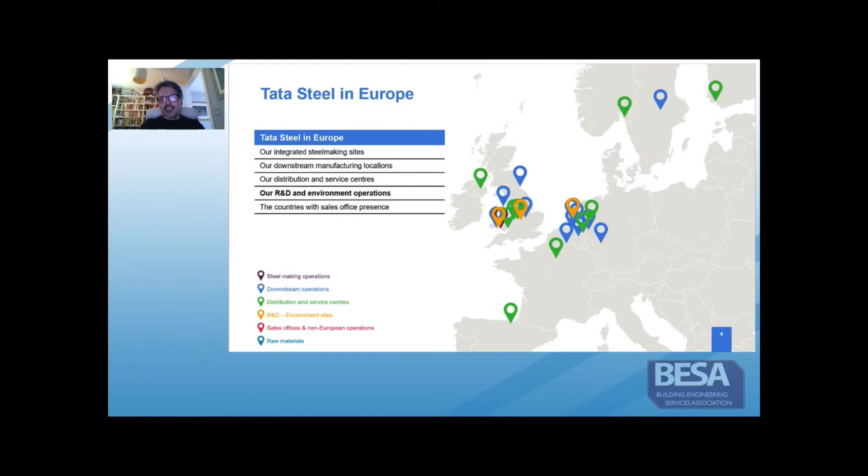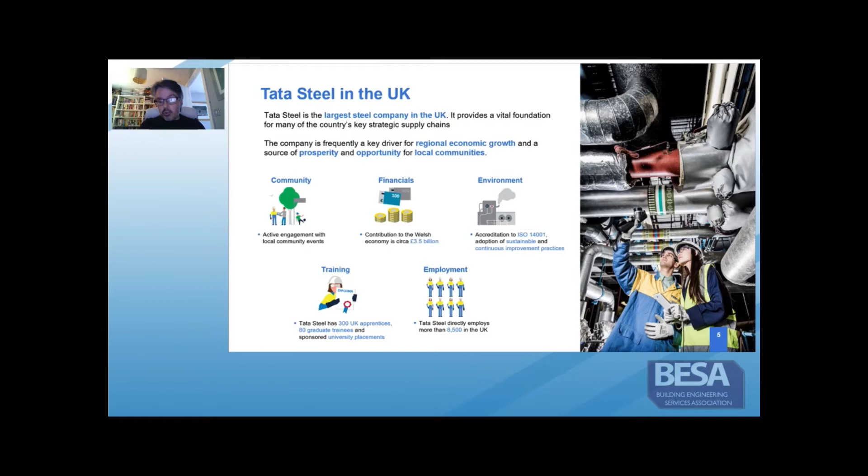Within the UK itself, we're the largest steel company. As a steel company, we act as a foundation clearly for many other industries and supply chains, employing about 9,000 people and engaged across academia, communities and many other partnerships, some of which are extremely important and we'll talk about today. But if we move on to the next slide.

And Tata Steel also have an environmental product declaration scheme that we're a program operator of. So that's a unique position for any manufacturer in the world. Unfortunately, we don't have time today to talk about that, so we'll talk about that another time. But in the meantime, if we move on to the next slide.

So that product is backed by years of experience, many decades producing those products from those assets. Those assets continue to improve with investment programs across the steel and the pipework manufacturing facilities. The products themselves are backed with a vast range of industry and product knowledge and expertise. I think engagement with manufacturers is a critical part of any design process, so we would certainly be pleased to further engage with the industry in this regard. So we move on to the next slide.

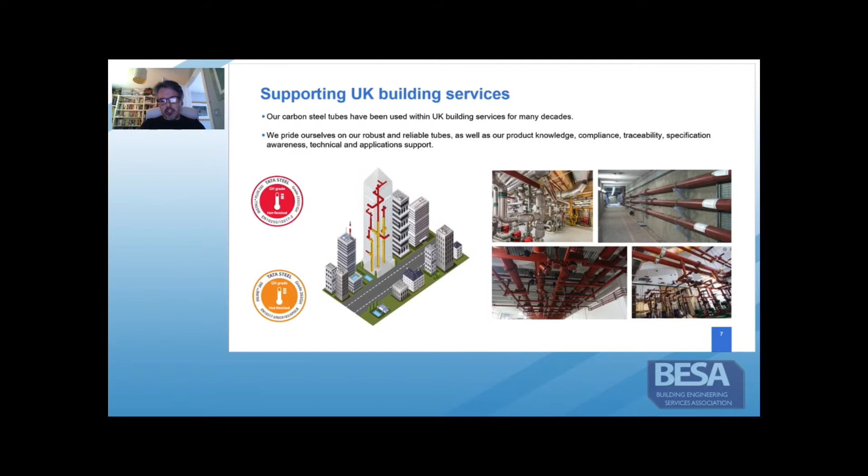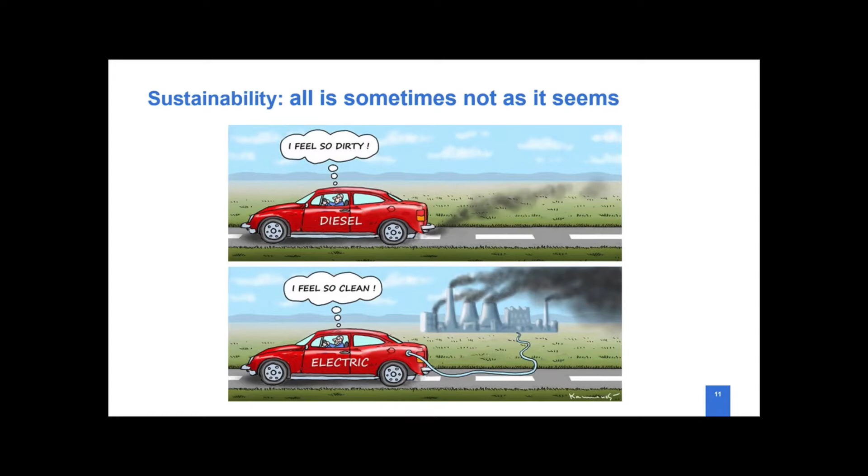So effectively, before we start, really important to understand, I think, that in this subject matter, all is sometimes not as it seems. These images here demonstrate that the subject of sustainability, and particularly environmental sustainability, which is the main focus of this presentation, is a complex matter. And whilst this image is a little bit tongue-in-cheek, there's a serious point behind it. It's a useful illustration that in environmental sustainability, making the optimum resource decision to limit the impact on our environment and our communities needs to consider the whole life cycle, the whole life impact, not just the immediate impact

of the action. So is it better to drive a diesel car and produce emissions directly, or to invest in an electric car and make the emissions further upstream, or ideally, of course, with renewable energy? The answer is, I don't know, without understanding the whole life cycle of the car, the power plant behind it, in order to make a more informed decision. And this goes to the heart of Tata Steel's sustainable development, that life cycle approach is a critical part of any decision making relating to resources. So we move to the next slide.

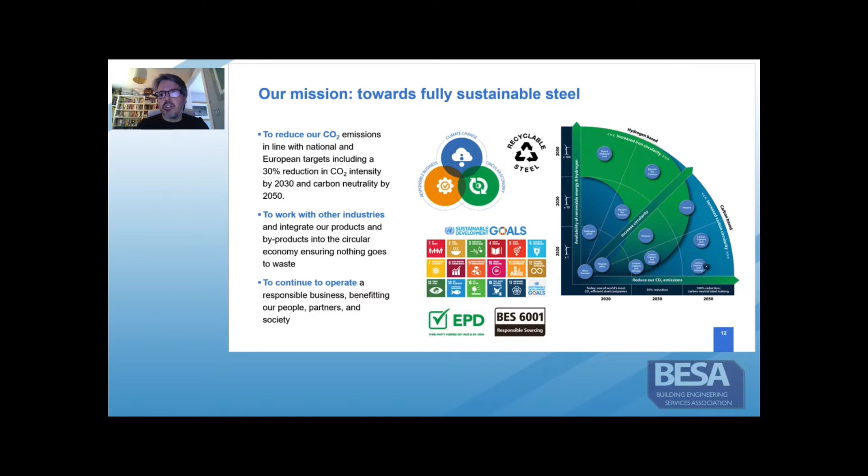So our vision across our sustainable development has three dimensions. Effectively, it's about decarbonisation, and we have a target of 30% reduction in CO2 intensity by 2030, with carbon neutrality by 2050. It's about working with other industries to leverage circular economy, ensure nothing goes to waste. And it's to continue to operate as a responsible business that benefits people, partners, and society. So moving on, one more click here, back to those three challenges.

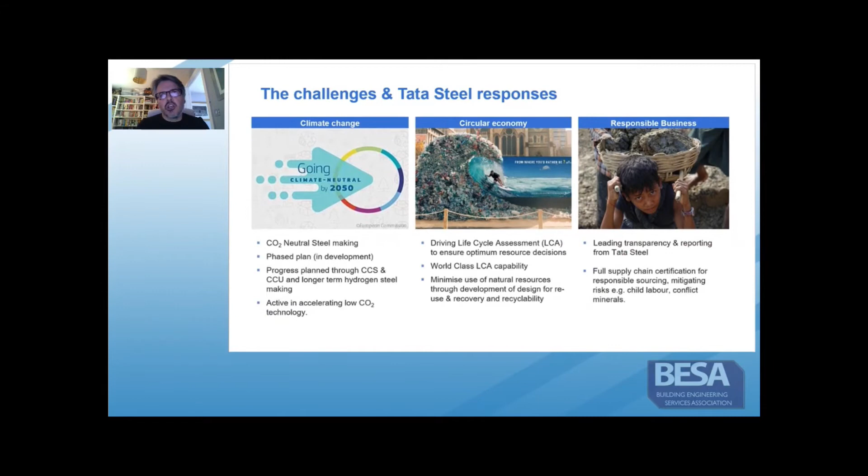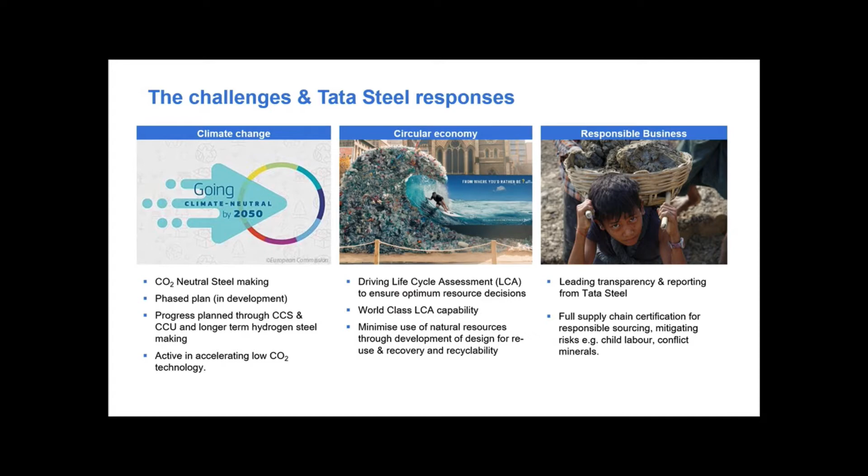So there's some detail here, which is a nice summary about where we want to go with carbon neutral steelmaking, about driving life cycle assessment, about minimizing resource use, not just within Tata Steel, but across the supply chain, and about leading in transparency and reporting. Some of these areas we won't have time to talk about today, but as I said earlier, really willing to engage. And if we move on to the next slide. So now we're going to talk about the pathways to carbon neutrality for steel and piping systems.

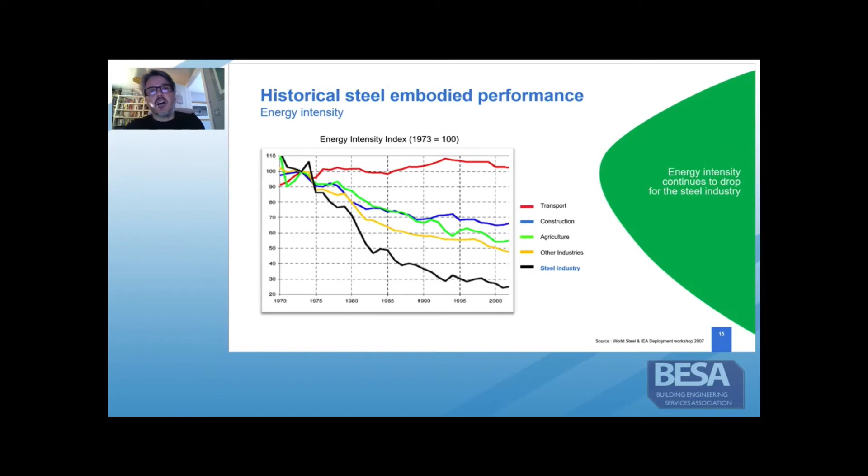And if we look at those pathways, a good place to start is with history. This slide here looks at the historic steel embodied performance related to energy intensity. And you can see the massive strides that the steel industry has made since the 70s up to, this is quite aged data now, but up to 2000, demonstrating the improvements that a number of industries have made in that regard.

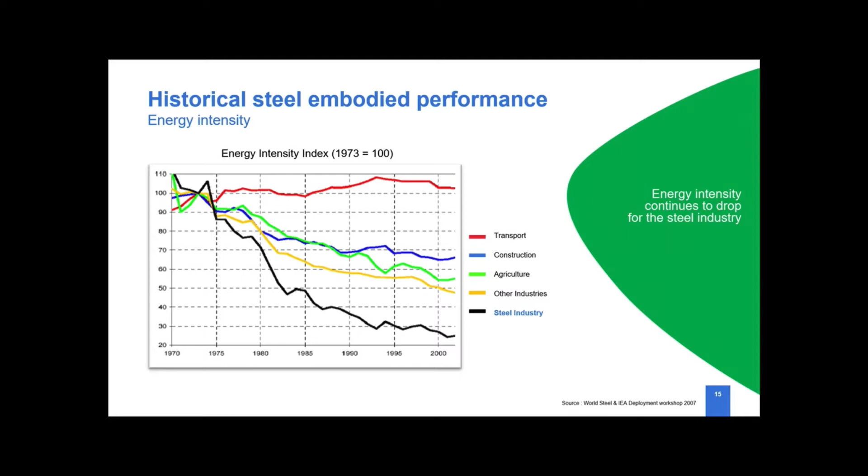And if we move to the next slide, this slide actually shows the carbon intensity of steelmaking from the early 90s. And since that time, there's been about 15% reduction in carbon intensity. And the variation you see around that trend relates to a number of variables: asset disposal, asset investment. But now we're getting towards physical limits of what's possible in terms of carbon reduction in steelmaking.

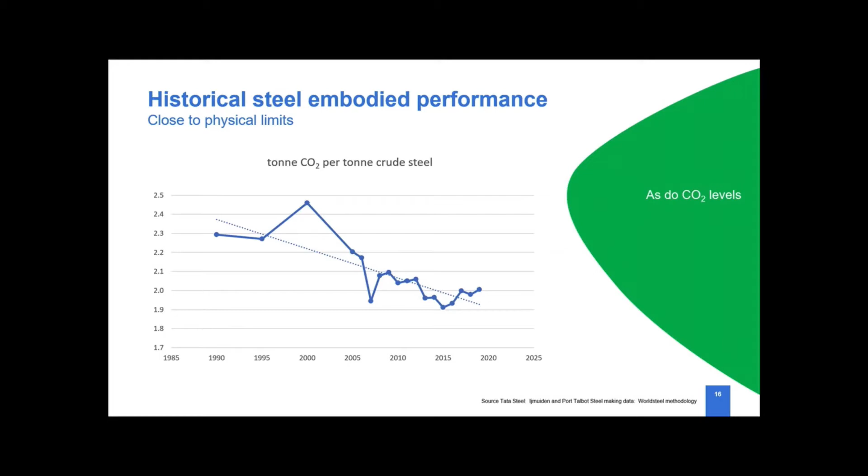And therefore, to make further reductions, we need new technologies and technological breakthroughs, and that's what we'll move on to talk about now. So if we move to the next slide, this brings us to roadmap options and potential pathways to carbon neutral steelmaking.

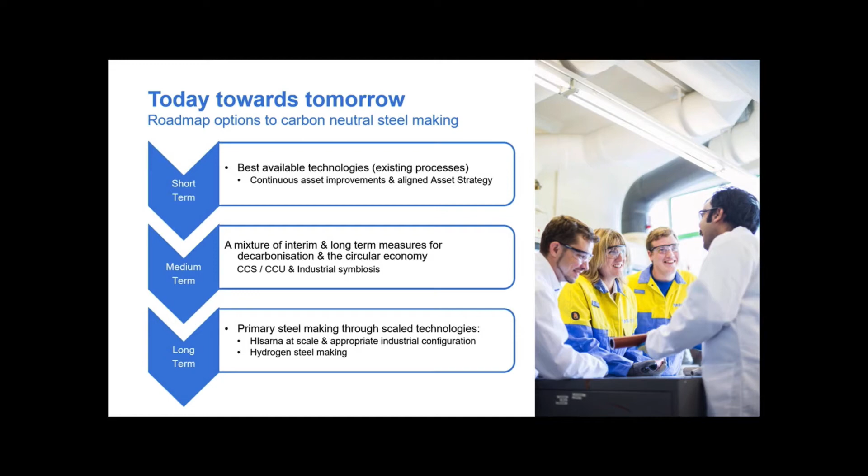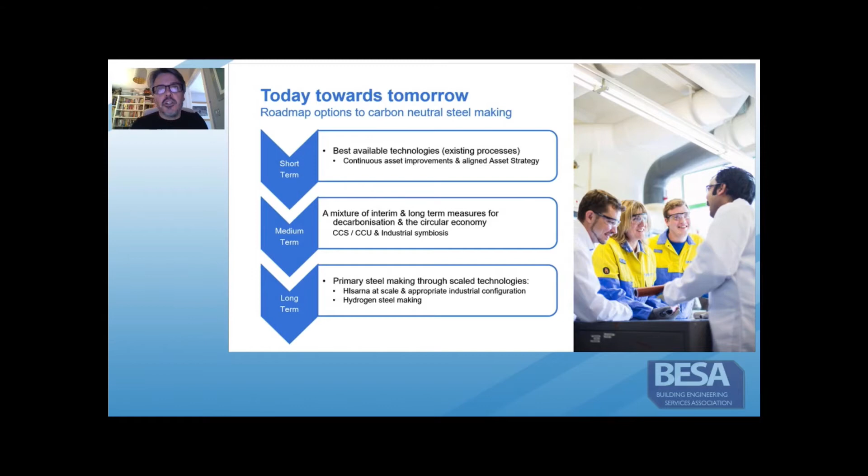In the short term, this involves utilizing best available technologies and aligning our asset strategy to ensure we don't make decisions today that impact our decarbonisation investments and agility tomorrow. In the medium term, it's about carbon avoidance in emissions to air and water, and rapid carbon avoidance utilizing carbon capture, storage and usage. In the longer term, it's looking at new and scaled technologies to deliver decarbonisation through carbon neutral steelmaking, utilizing low CO2 steelmaking processes like a technology I'll tell you about called Hisarna, which is a Tata Steel technology.

This was initially developed by the ultra-low CO2 steelmaking consortium called ULCOS, and Tata Steel bought the rights to this technology from that organization a few years ago. We've invested in a large-scale pilot plant, around 60,000 tons annual capacity, where we've been running trials to develop and optimize the technology.

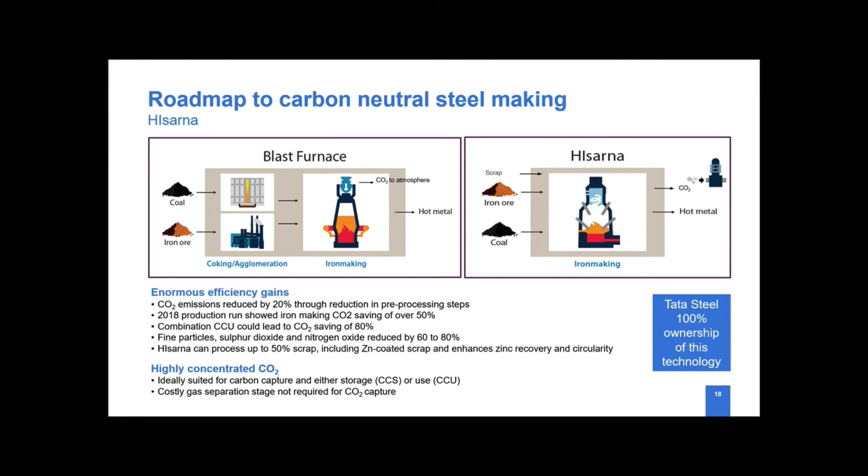The benefit of this in terms of carbon reduction was assumed to be around 20% before large-scale trials took place, but those large-scale trials now demonstrate around 50% benefit improvement. So it's not total decarbonisation, but it certainly goes a long way to decarbonising the iron-making process before making steel. There are further benefits too in terms of reduction in particulates to air and other emissions, and also the ability to utilise higher scrap levels with this process compared with traditional blast furnace steelmaking.

Scrap steelmaking isn't the total answer to decarbonisation. There are lots of issues with using higher levels of scrap around the cleanliness of the steel and the quality of the products, but when managed properly it can certainly help.

It's also well suited, the configuration of this Hisarna equipment, to carbon capture and storage, with a potential 80% reduction in CO2 emissions. The next steps for this Hisarna technology involve further proving of the technology, but it's just about there today, and it's really about scaling it up. If we move to the next slide.

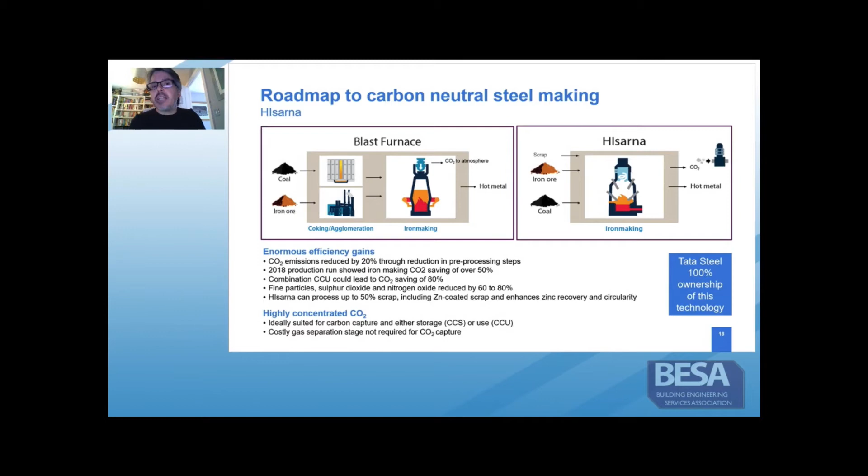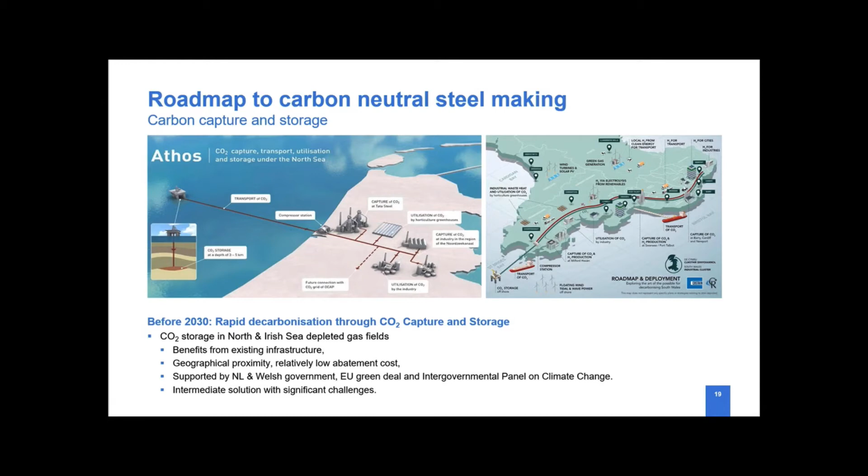So I already said that in terms of rapid decarbonisation or rapid carbon avoidance, it'll be about carbon capture and storage initially. And this, of course, aligns very much with that Hisarna technology I've just mentioned. Clearly this is an interim measure, as carbon is still being produced, albeit it's being captured. And whilst an interim measure, it does offer opportunities for rapid carbon avoidance.

There are challenges around carbon capture and storage, there's no doubt, but one technological solution for storage is to use the depleted gas fields and oil fields in the North Sea. Tata Steel's North Netherlands and South Wales assets are very well positioned for utilising those depleted gas fields. And that's not quite as outlandish as it might sound to those fresh to this type of solution, because the UK government recently granted its first injection license to a company called Pale Blue Dot Energy for a project called the Acorn Carbon Capture Project in the North Sea, which will use an ex-Shell gas field to do exactly that.

And Tata Steel have been involved in a number of projects, both in the South Wales industrial cluster you see on the right-hand graphic there, and the Athos project you see in the North Netherlands on the left-hand graphic there. And whilst there are still significant challenges across utilising carbon capture and storage in this way, the initial studies and the work we've been doing with external partners is extremely positive. If I was a betting man, I would say this is a technology that will certainly run. If we move to the next slide.

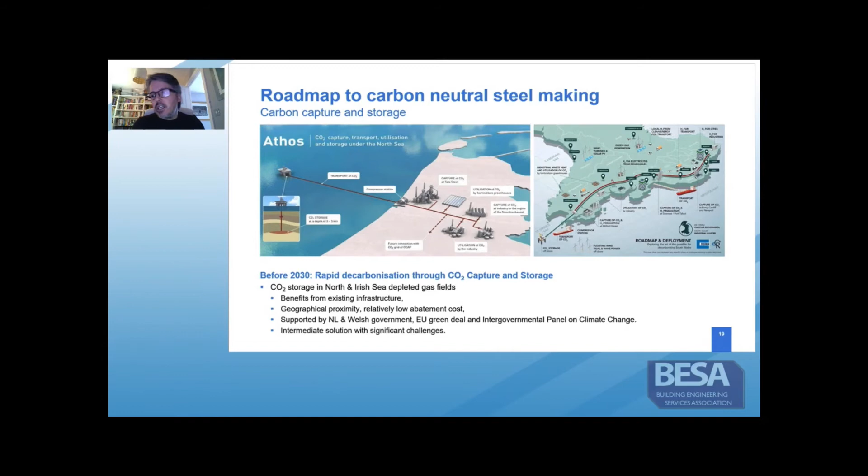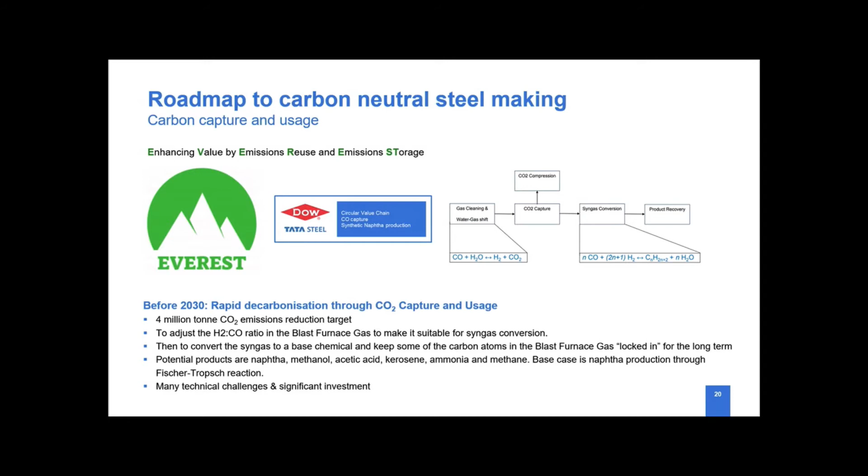There's also an opportunity not just to capture the carbon, but to use it in industrial symbiosis. Tata Steel are working with external organizations, big chemical companies like Dow, looking at optimizing the industrial gases and the carbon we produce, turning that waste into an input for the plastics industry, for example, to manufacture totally recyclable plastics. So we effectively capture the carbon, put it into a product that can be 100% recycled, creating a closed loop and delivering a circular economy.

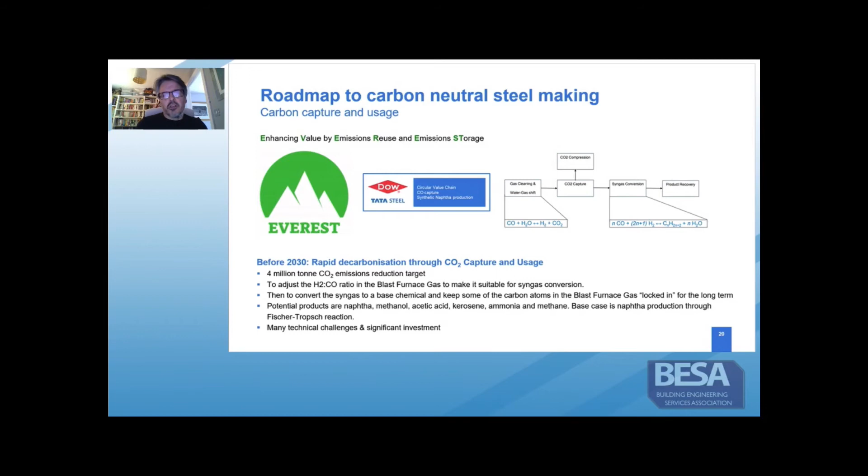There's lots of work with external industrial partners, and they are critical to doing this. If we move to the next slide.

One potential solution for decarbonisation of not just steelmaking but wider industrial decarbonisation is the use of hydrogen. In iron making, it's used as a reductant in place of coal. Hydrogen reacts with iron ore in a very similar fashion to coking coal, but instead of the byproduct being carbon dioxide, the byproduct is H2O, or water. It has much potential both in iron making and steel making, as well as wider industrialization.

A process known as electrolysis, effectively splitting water into its constituent oxygen and hydrogen, is the first stage, and this has the potential to deliver clean, low carbon technology. But to do that cleanly, we can't just produce hydrogen by burning gas—that's robbing Peter to pay Paul. We really need large amounts of renewable energy to do it in a clean way, so this technology is very reliant on the primary energy mix of nations, whether that's North Netherlands or South Wales in the UK. We really need an enormous amount of renewable energy.

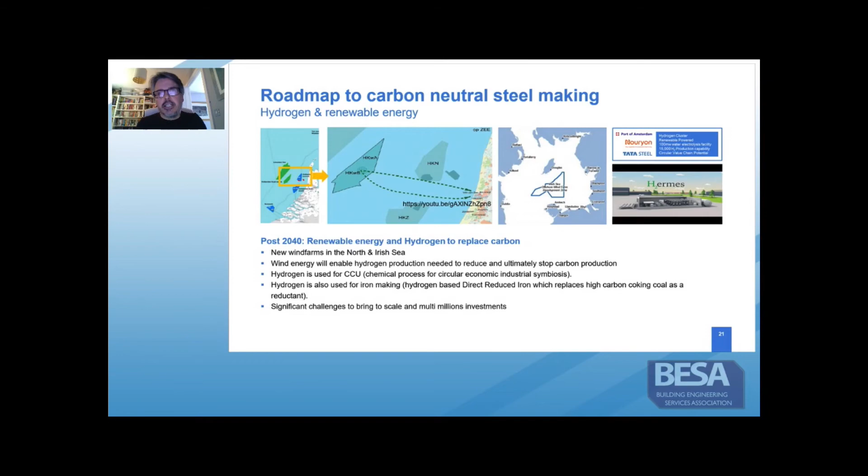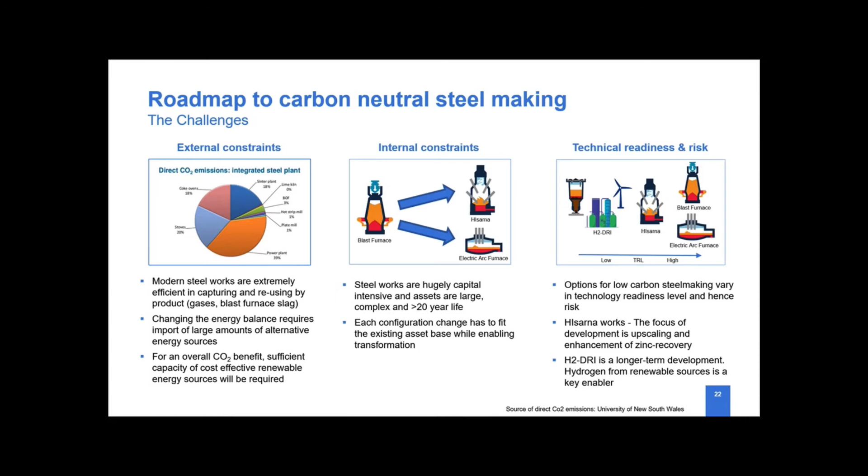I've already mentioned a number of challenges across these technologies and wider industrial decarbonisation, and it's probably fair to say such decarbonisation will always be a challenge as we move forward. But I thought it worth outlining some specific to steel. One, of course, is scale—steel is the most used metal in the world. It's also one of the most recycled materials, and it's central to many sectors, from mobile communications to transport to building services. So we've got a big challenge in delivering decarbonisation across that.

I've already mentioned the energy mix is a key challenge, and steel plants in Europe are already fairly efficient, with many circular economic processes in place—capturing gases, capturing heat, reuse of waste for internal processes and other industries. For example, there's a waste product from steel making that goes towards the manufacture of concrete, saving millions and millions of tons of CO2 for the concrete industry and concrete applications.

However, for large scale industrial decarbonisation, I think the biggest single challenge will be around renewable energy and investment. But there are also internal constraints—the capital intensive nature of the steel industry, the long investment cycles, and the life of assets mean there's a massive amount of forward planning and development required to deliver this over the timescale required for the targets we're aiming for.

And finally, there's a technology challenge. A number of potential decarbonisation technologies are at low levels of technical readiness—for example, hydrogen electrolysis is not at industrial scale today. So there's a scaling and development of those technologies that's going to be required.

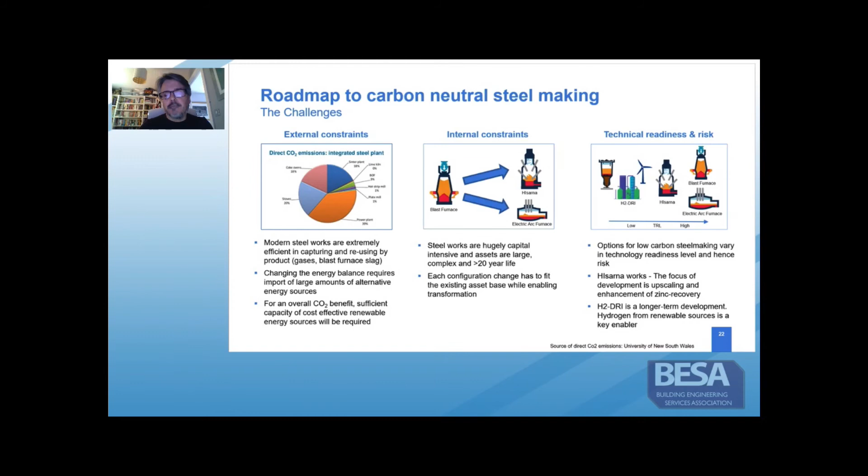If we move to the next slide—as the final part of the presentation, we want to talk about what we can do today. Some of the pathways to carbon neutrality are clearly being worked on today and will continue to drive delivery, but there's stuff we can be doing as a supply chain today. If we move to the next slide.

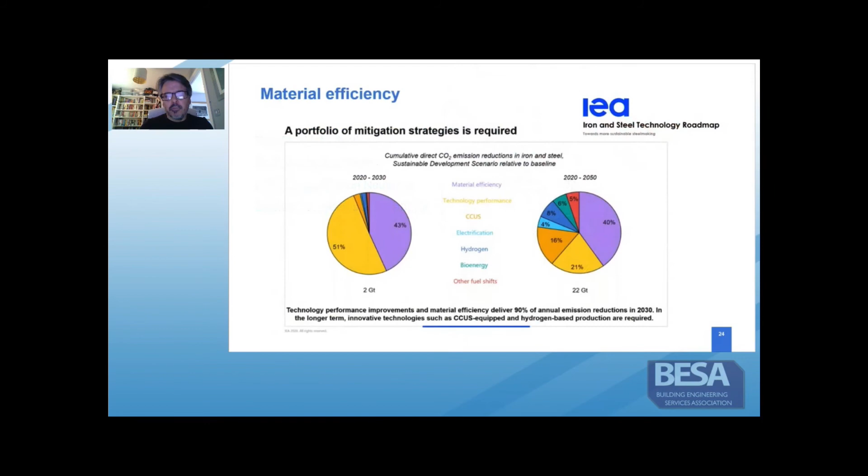This is a bit of a complex graphic, but the International Energy Agency released an iron and steel technology roadmap, and it really captured my imagination. You can see the purple parts of that graphic - the pie charts show how we're going to deliver decarbonisation across the steel industry, and the purple parts are about material efficiency. Nearly half of the decarbonisation comes through material efficiency - designing correctly, designing optimally, having full supply chain collaboration in such designs, developing future products, and developing more durable and flexible products. So there's a real important part we can play as an industry.

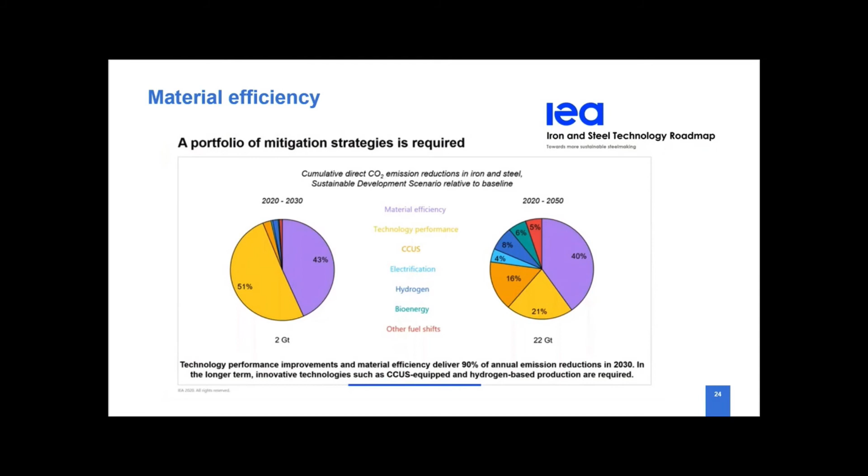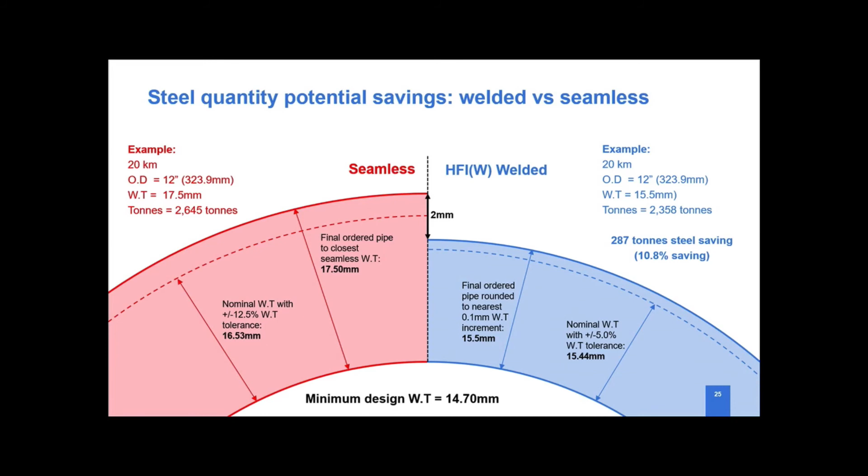If we move to the next slide, we see an example here of seamless and welded pipe. With the tighter manufacturing tolerances of a welded pipe solution, and the flexibility in how you manufacture welded pipe, you can manufacture welded pipes to the nearest 0.1 of a millimeter because it's made from coil, unlike seamless pipes which require sets of rollers to make given diameters and thicknesses. Therefore, depending on size and thickness, our calculations show you can save up to 16% material just by utilizing the benefits of that welded solution. That's a classic example of how we can do that just by looking at manufacturing tolerances and flexibility. Engaging with the manufacturers - not just welding manufacturers, but seamless manufacturers as well - to drive that efficiency is a really important part of what we need to do as an industry.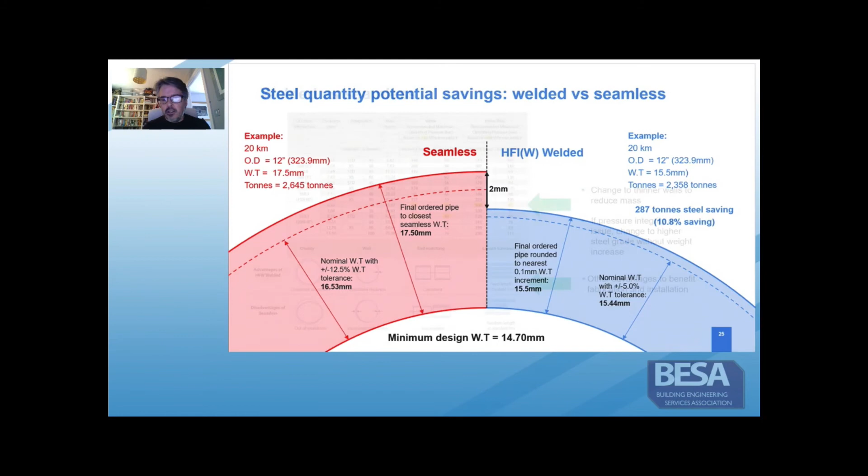If we move to the next slide - this is again a complex graphic, but the message here is that whilst we might move to thinner walls because of manufacturing tolerances, while still meeting a minimum design thickness, you might have concerns on pressures. This graphic is talking about how we can move to higher strengths to deliver the minimum requirements in terms of design, but still deliver the weight savings. Those weight savings pass through every part of the carbon cycle - whether that's the manufacturing stage, manufacturing less steel, the transport stage, transporting less steel, or the fit up, the welding, however you put together your building services pipework - it's going to be faster and more efficient. So the clarion call here is to engage with your manufacturer, your manufacturing supply base, or your supply chain to try and understand these efficiencies that are available.

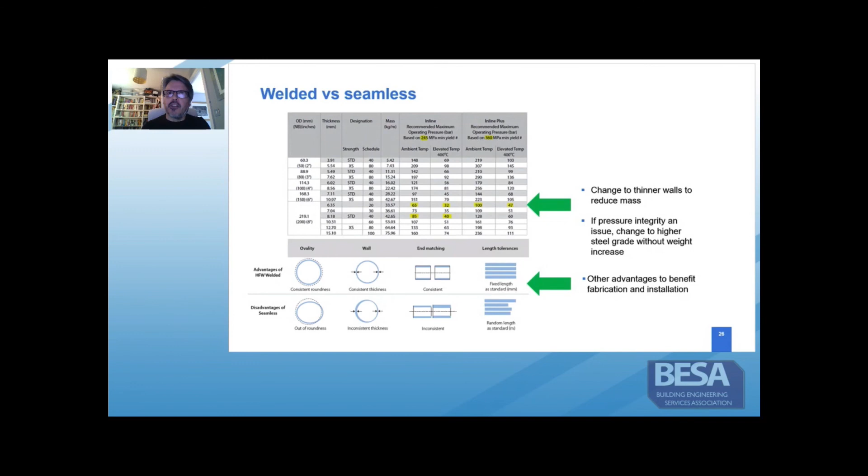I'd finally reiterate there's lots of great work ongoing for decarbonisation, but I think the real lesson for us all is that the stuff we can be doing today with colleagues like Chris, who's now shown on screen - a technical colleague, an expert on the products I've been talking about, expert on design aspects - is that we can work together to deliver a more efficient and effective supply chain and capture those decarbonisation benefits through material efficiency early. That makes life so much easier when we're talking mass decarbonisation and mass carbon avoidance through those big industrial investments and technologies in the next 5 to 15 years.